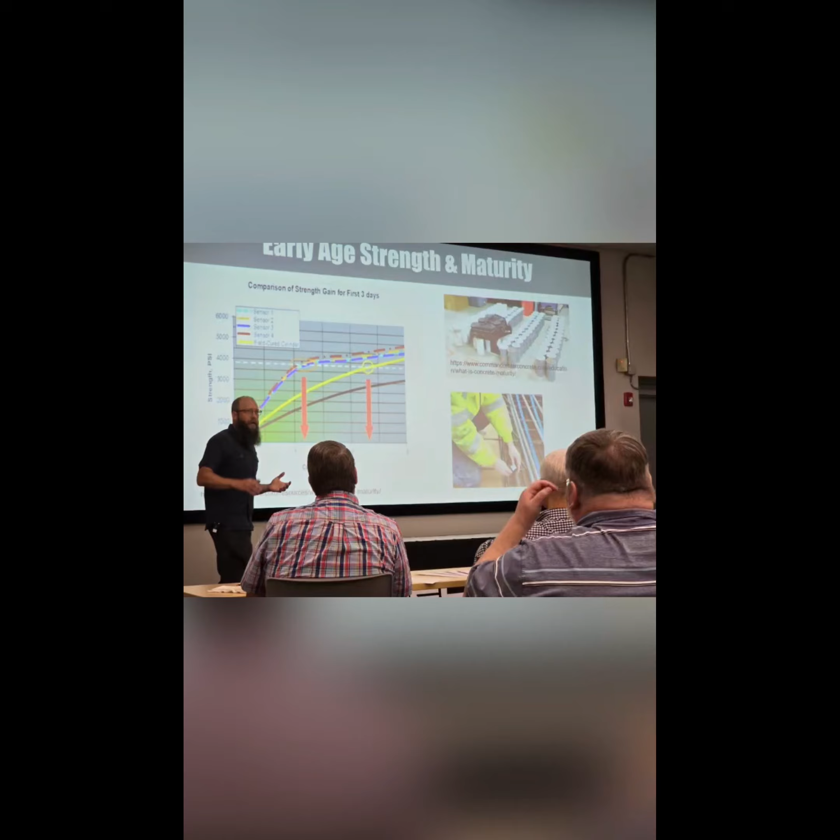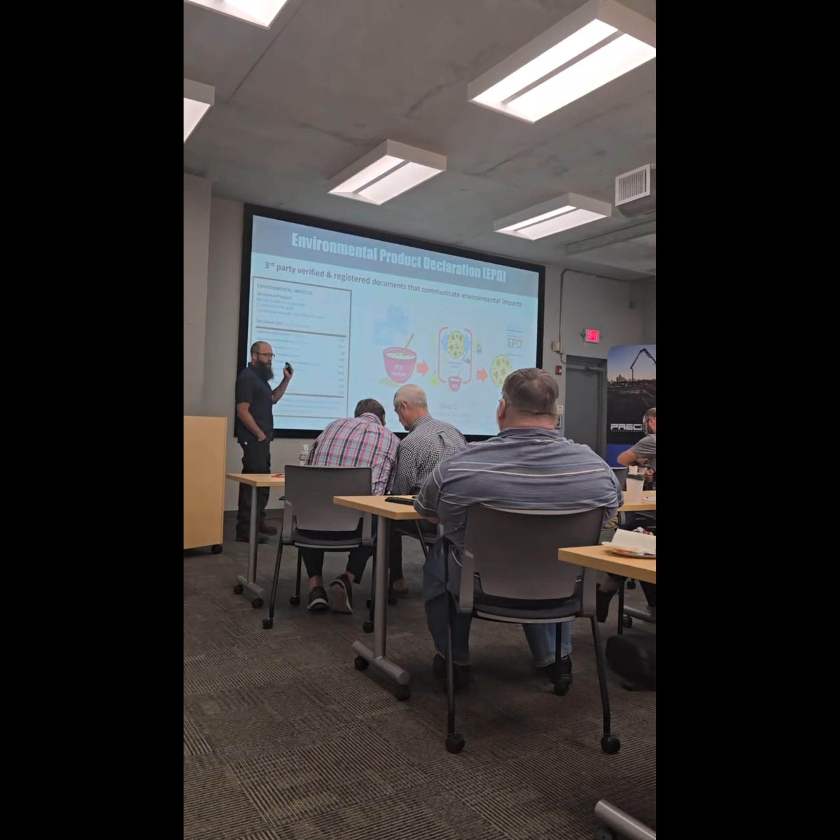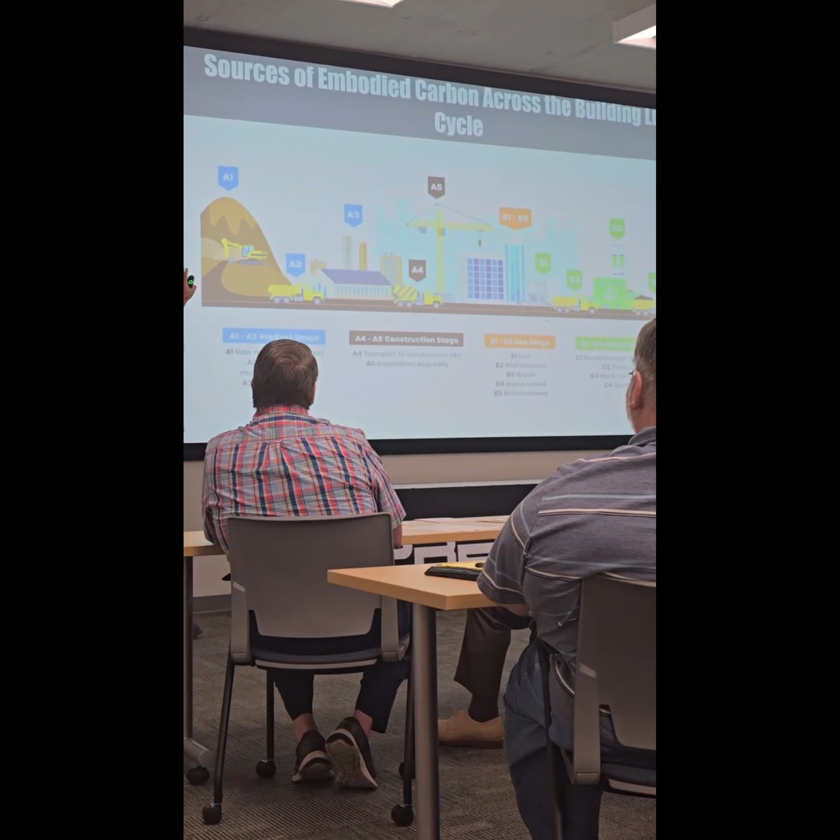Recycling the building materials and the construction of the buildings. That's what this group in this room really influences today, and same issue. And again, we're going to focus on pretty much that cradle to gate and what that looks like. So that's the manufacturing of the concrete materials, the mining of the limestone to put into the cement kilns, the mining of the aggregates, the transportation of the aggregates to our plant, the production of the concrete.

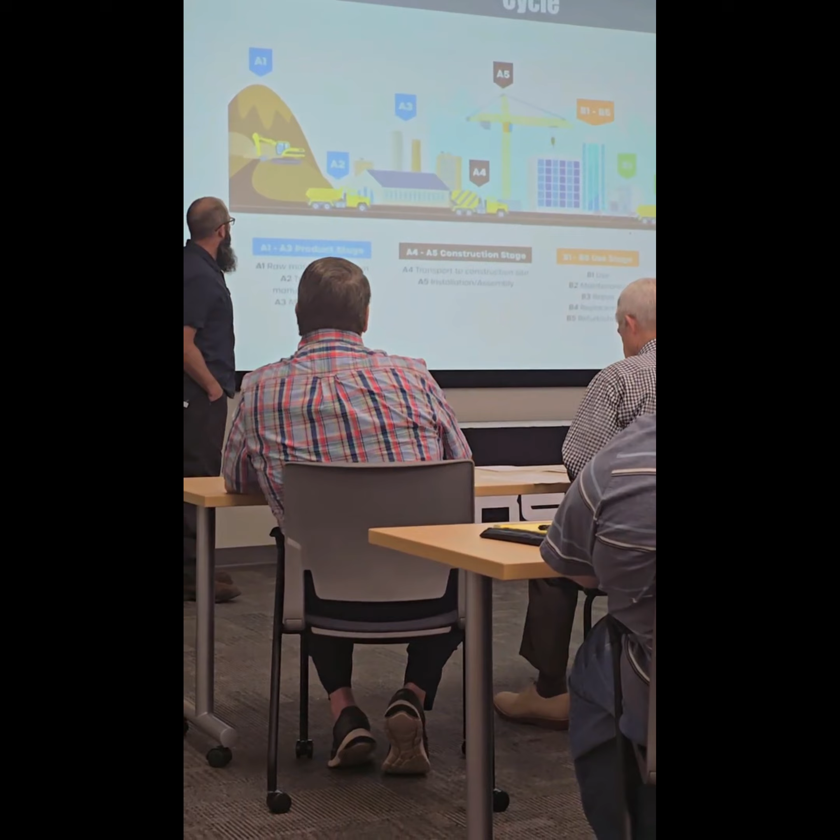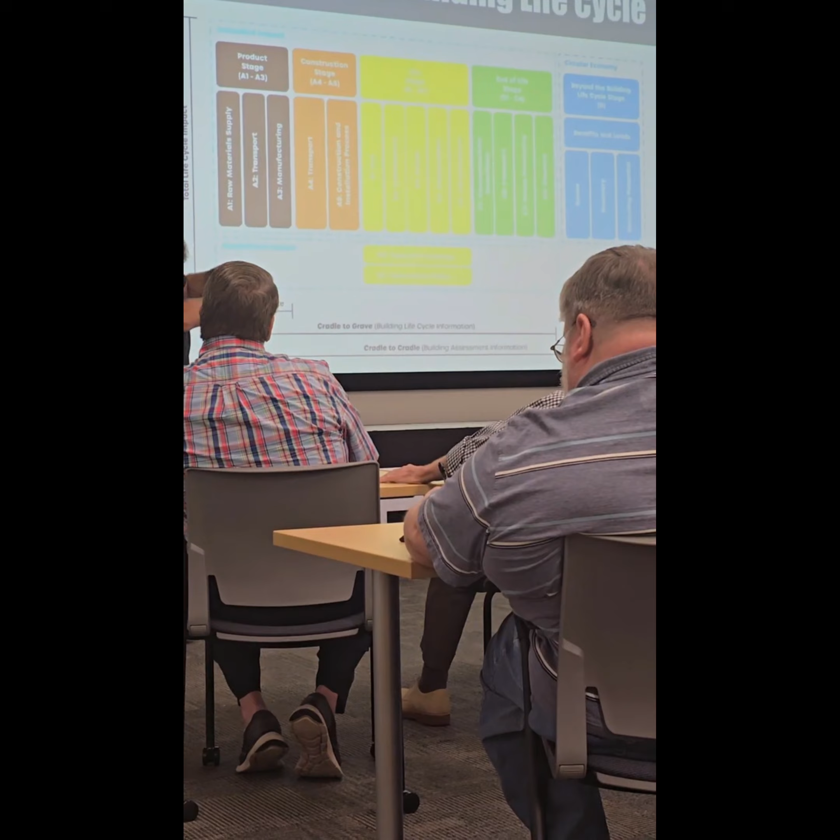So another term for that is often cradle to gate. Cradle to gate. Or if we look at the whole life cycle of the building and we talk about recycling some of the materials, we're looking at that kind of circular economy, which I'll mention a little later. But for the most part, with the EPDs we're focusing on, it's going to be that cradle to gate EPD.

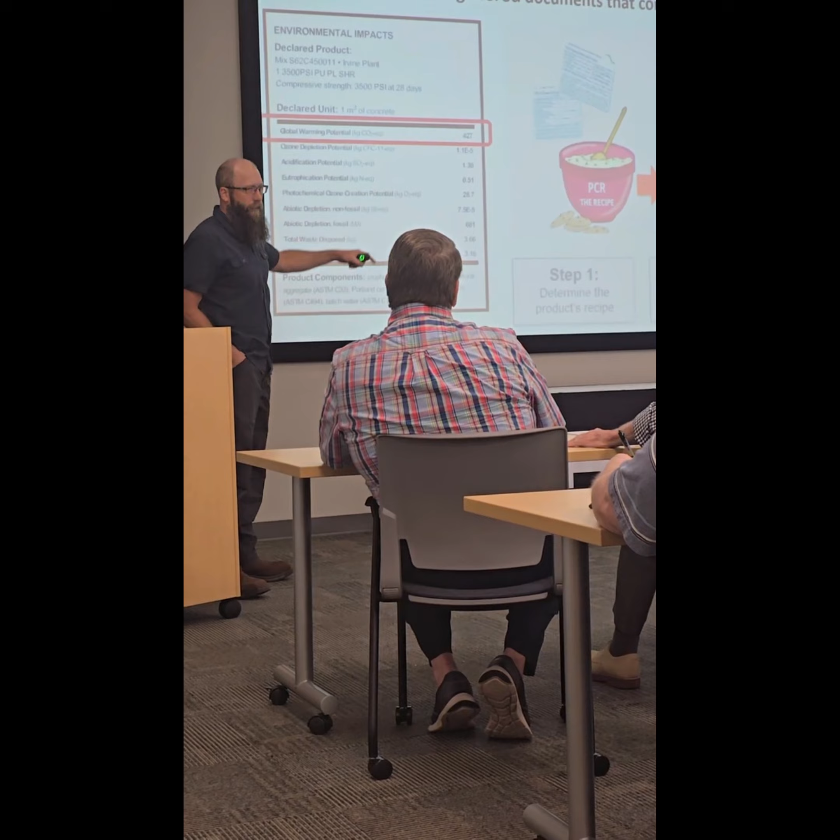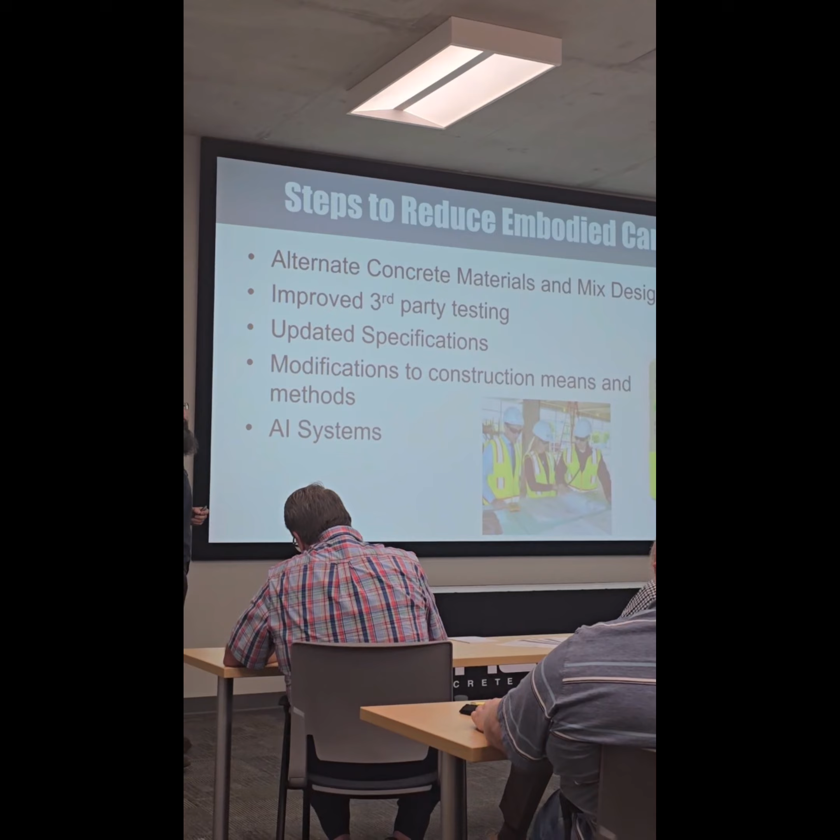And the same, everybody in the concrete industry likes cookies. Same cooking analogy here. But how do we get this value from a mix aspect to lower our embodied carbon? Talking about alternate mixes and materials. I don't know if we got any third-party labs in here, but I know I got some ready mix guys in here, and they'll probably support me when we talk about some materials.

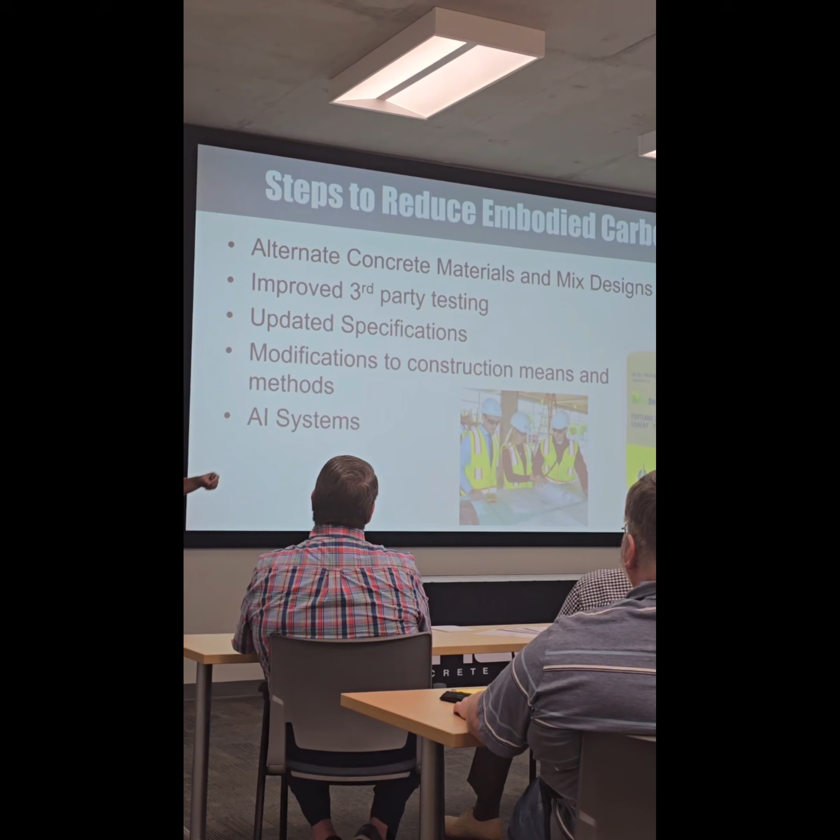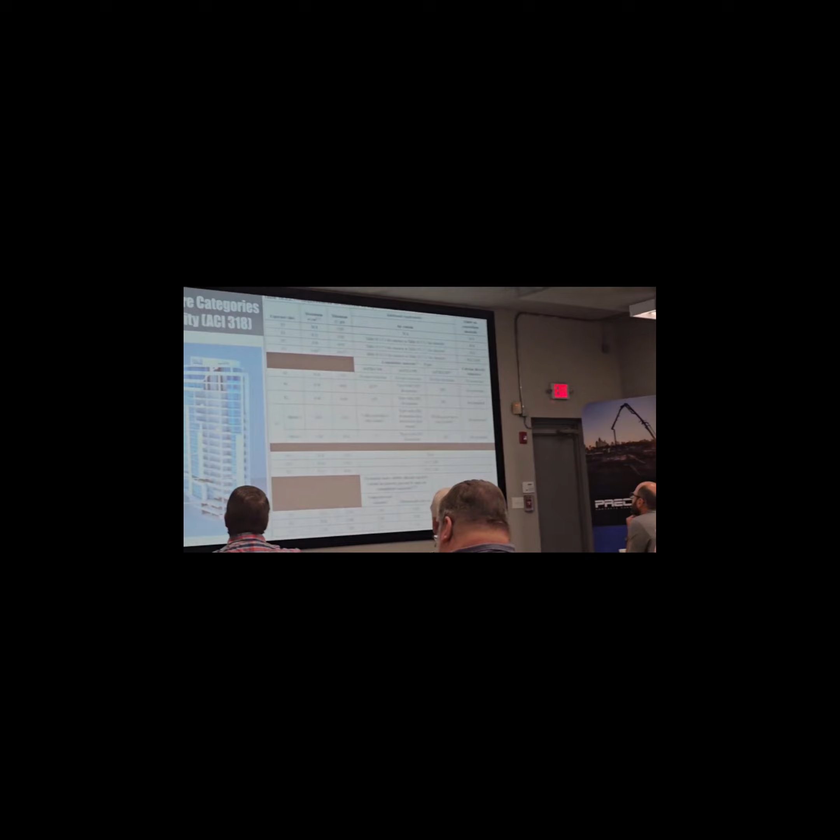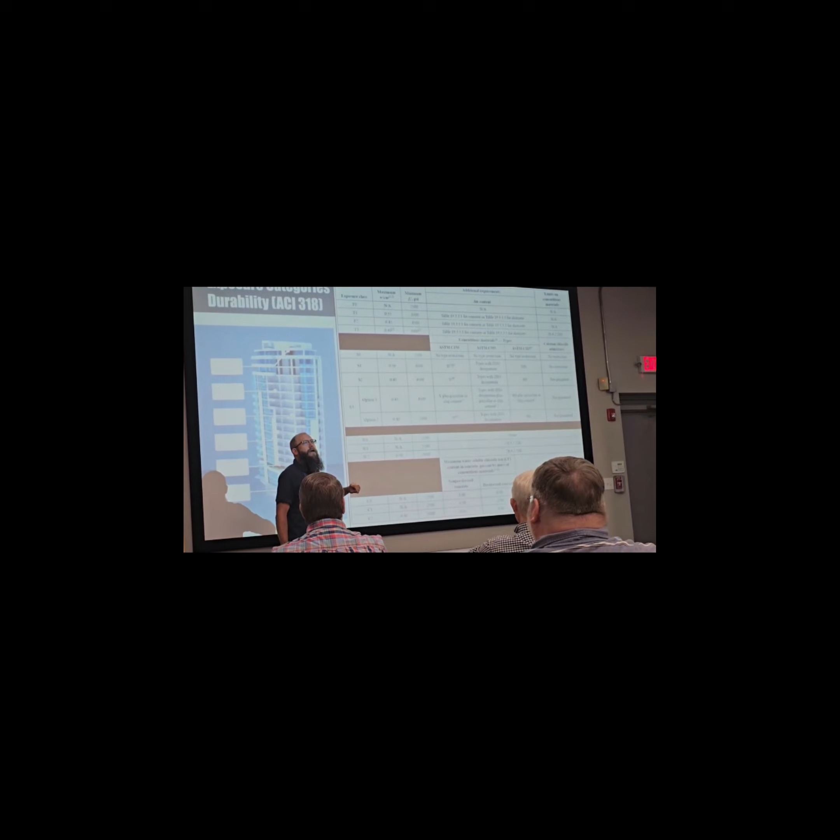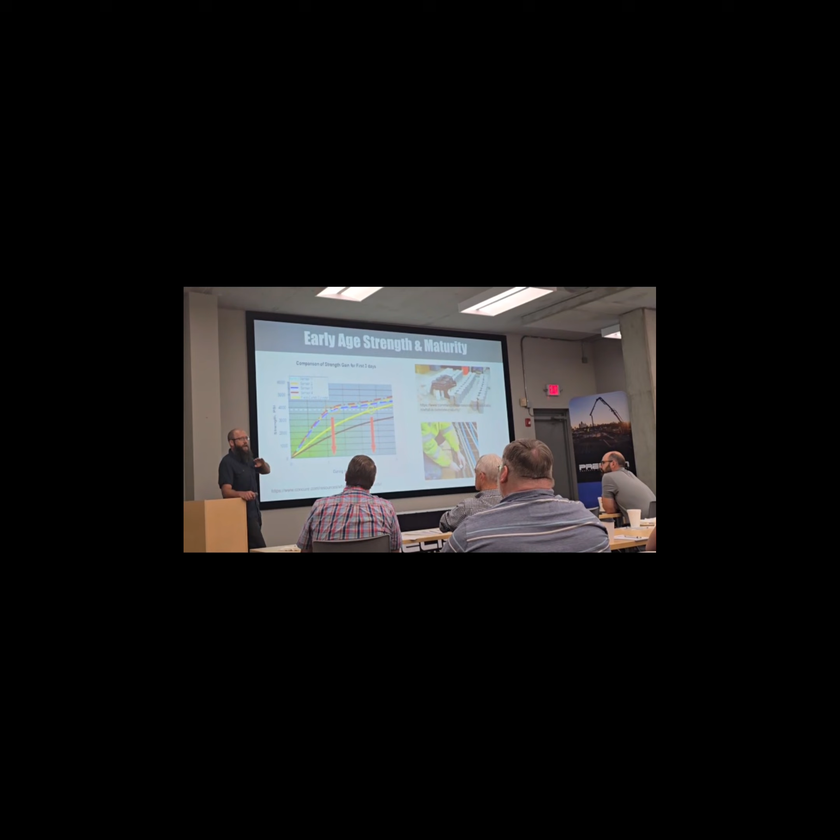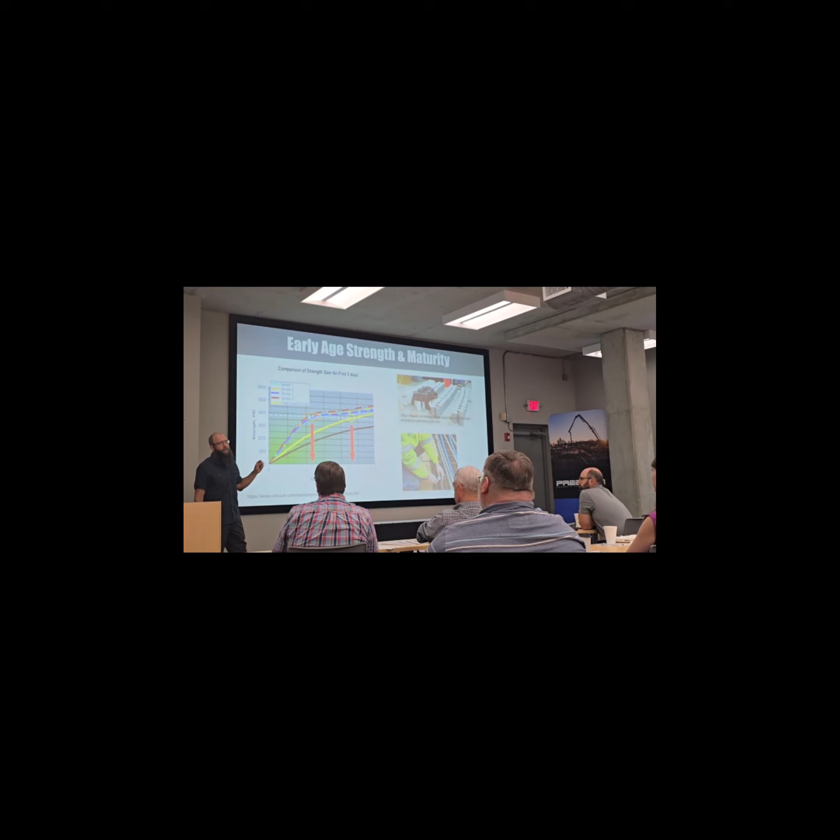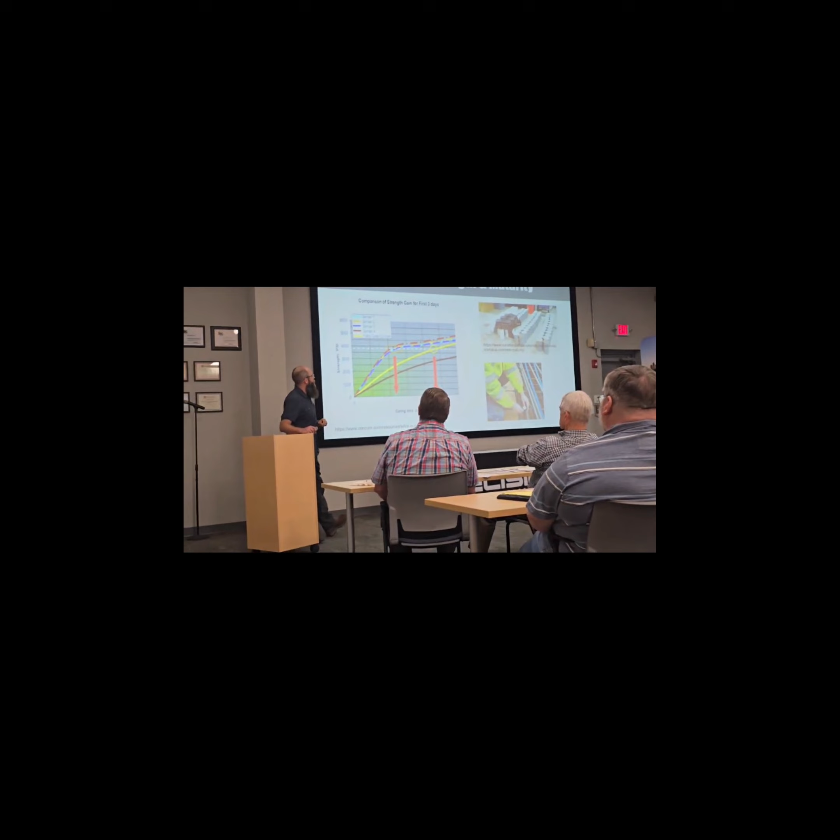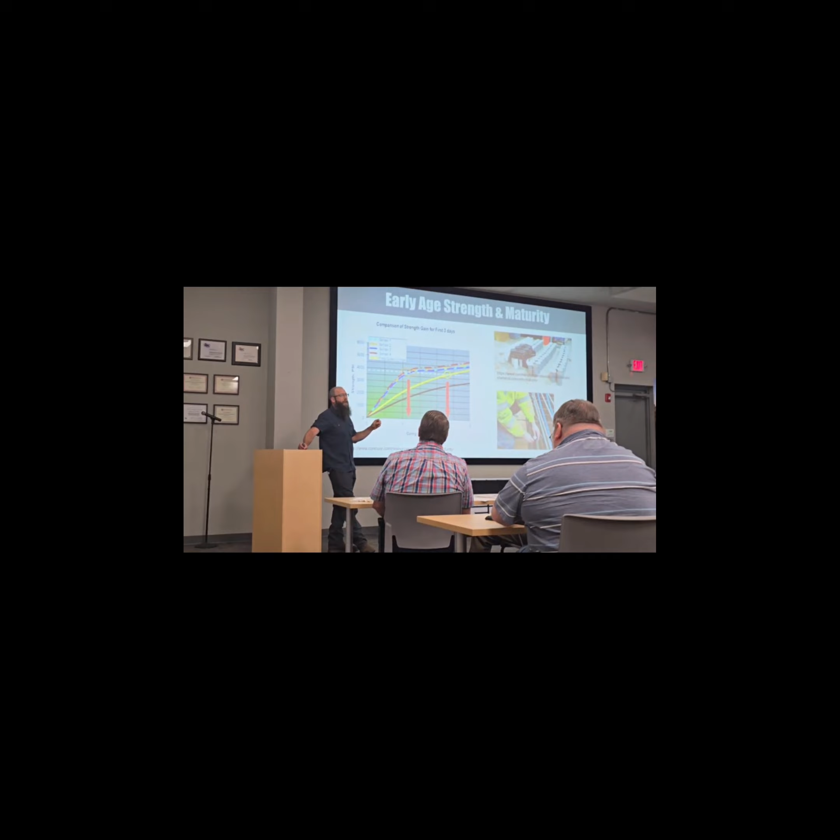Early age strength, the 2 variables are time and temperature. I have not figured out how to manipulate time, but we can manipulate temperature. So I give you 3 mixes. And the reality is, the pricing of those mixes is often different as well. So if you care about the economics, you may be able to get that summer mix that likely has more fly ash, that has a lower carbon footprint than everything else, to work longer into the fall, longer into the winter by utilizing hot water.

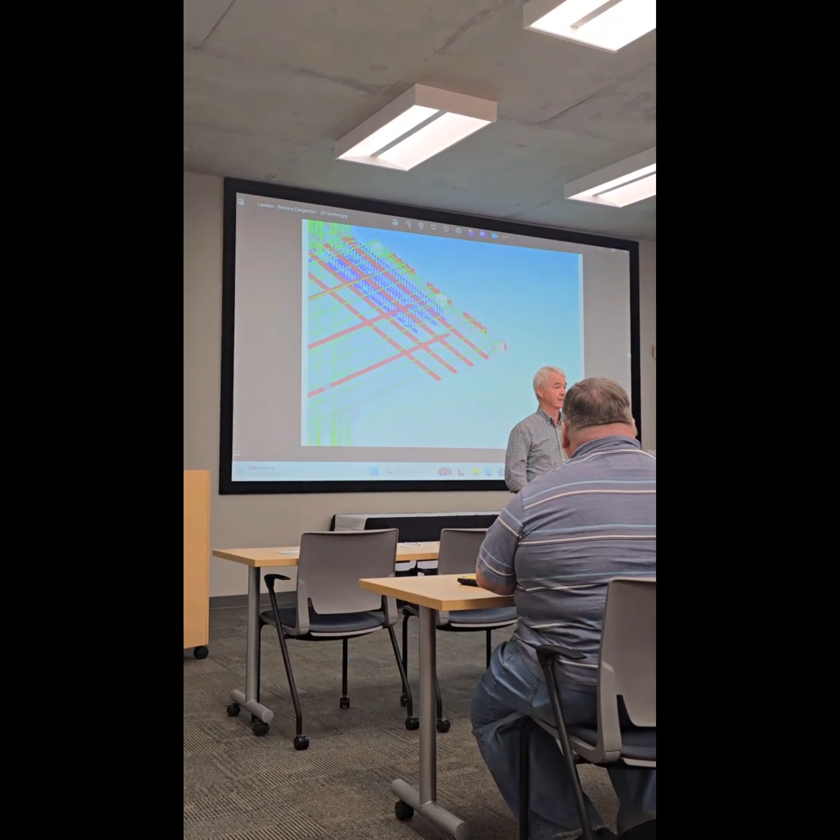Work, and we're doing a great job. There's hardly anybody on the planet that can do concrete work as efficiently as we do in the United States. We're doing great. And can we do better? Of course we can. It's going to be hard to do. We've been doing it about 100 years, and we're going to have to do some things differently. And we're going to have to spend some money, and it's going to be painful. And this is a crude industry that resists change. We fight technology stupidly every day when we go to work.